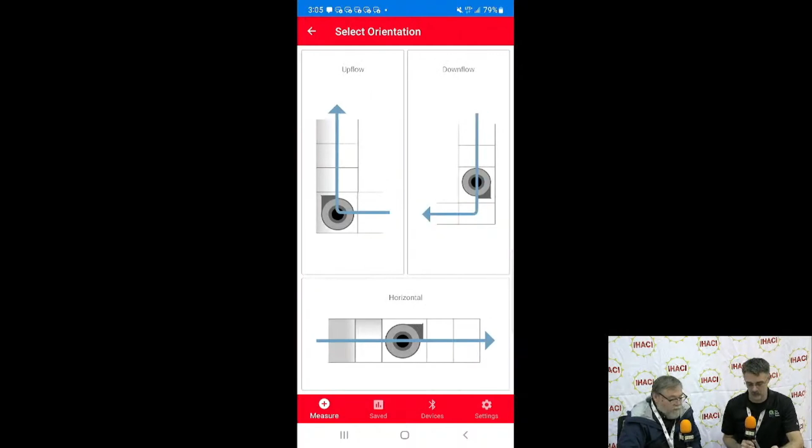And what's a common furnace type in your area? Upflow. Okay, so let's select an upflow furnace.

Now we've got to answer some questions about that system, like where our air filter is located. The choices we get are filter grill, filter slot in the return duct or cabinet, or multiple filter grills.

And you and I talked about this earlier briefly, right? You were talking about multiple filter grills? No, that was somebody else. Okay, that was somebody else. That's okay, it was my twin brother. It was your twin brother? Okay, well there's a lot of people I've talked to here already.

But multiple filter grills is a question we get a lot about - how to handle multiple filter grills. So let's take a look at that, because there's a lot of houses out there with multiple filter grills in them.

So this is going to be part of the forecast view: do we want to separate the filter pressure drop from the return pressure drop, taking the filter out of that calculation?

So there we have to take another pressure reading immediately on the backside of the filter. That way we can show how much pressure drop happens at the filter versus how much happens in the return duct. So if we separate those two, that's going to take another reading for us.

External indoor cooling coil - well yeah, because we've got a gas furnace, we're going to have a coil that's separate, so we got to put that in there. So we want to put our rated input - what's our rated input on that furnace in BTUs per hour? Let's just say it's 80,000. Okay, we'll go with 80,000.

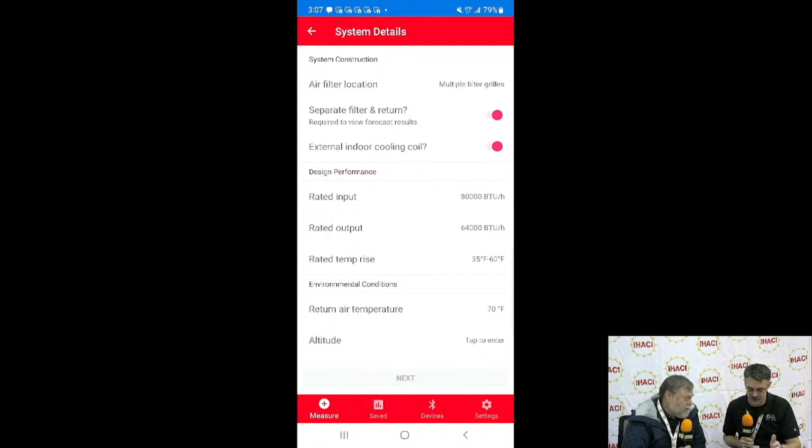All right, so there's our 35 to 60. Our return air temperature comes in nominal at 70 degrees. Just say you can change that. We'll just leave it at 70 for now. Altitude, let's just say it's 75 feet. We're in Modesto, 75 feet. Okay, so pretty low down.

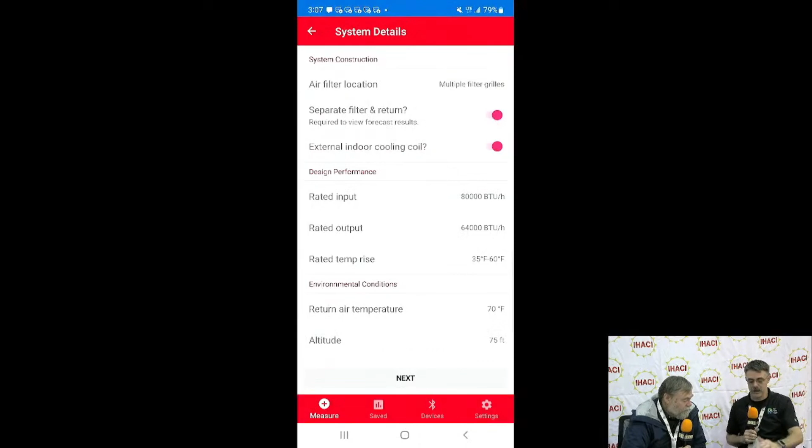Now that we've got all that information filled in, we're just going to hit next. It's going to give you some notes here. It's going to tell you to close the humidifier dampers if you have any.

We're in a dry climate, so you may want to have humidifiers in the wintertime. Right, might be a good thing. California, we don't usually do it, so all our moisture stays in the air, doesn't freeze out. That's part of the reason it doesn't freeze out all the moisture, so we don't need a humidifier typically in Central Valley. Gotcha. Of Modesto.

I mean, they put these notes in there as universal because they go across the country. It's not just California, it's everywhere. Yeah, my market, we use a lot of bypass humidifiers. That's a very applicable note. Right, so you would have to put that. We would have to close that.

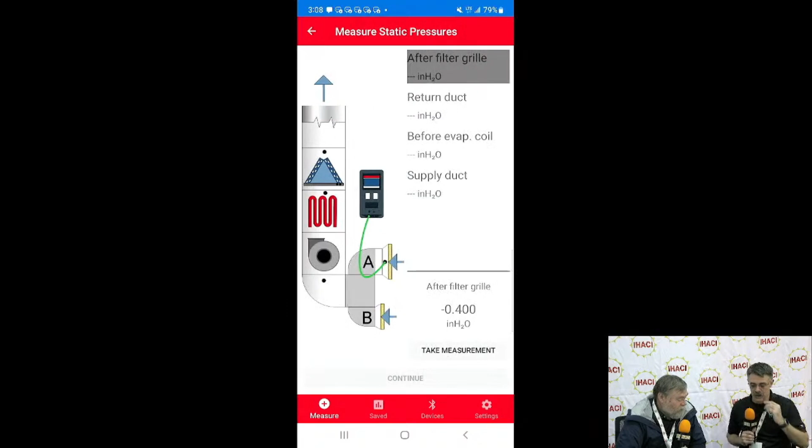So we want to set the equipment up to heating mode, high heating speed, and then we're going to take the pressure measurements. It's going to indicate where to take these duct pressure measurements. Right, so now it's going to show you where to go, where to take stuff at. So on this one, because we're going to have 4 measurements now: one side of the filter, the return duct itself, before the coil, after the coil, and supply duct.

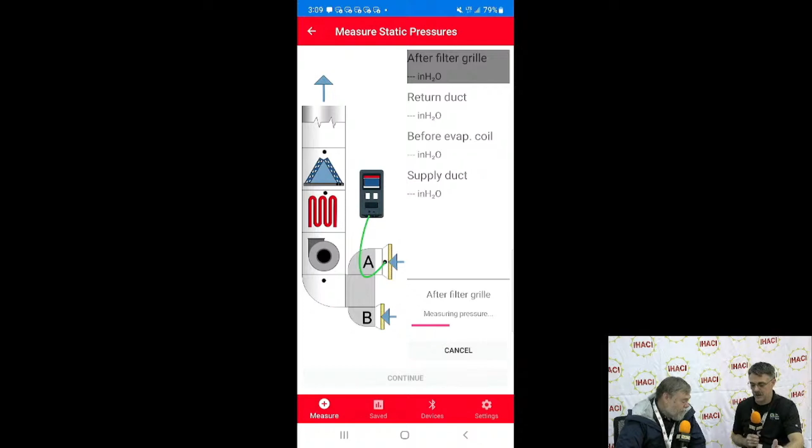Yep, so we're going to put the probe in there wherever it shows on the screen. You're just going to hit take measurement. And in this case, it was saying 0.40, negative 0.40, and it's going to put that in. Now Mitch knows this because this is a demo mode and it does the same thing every time.

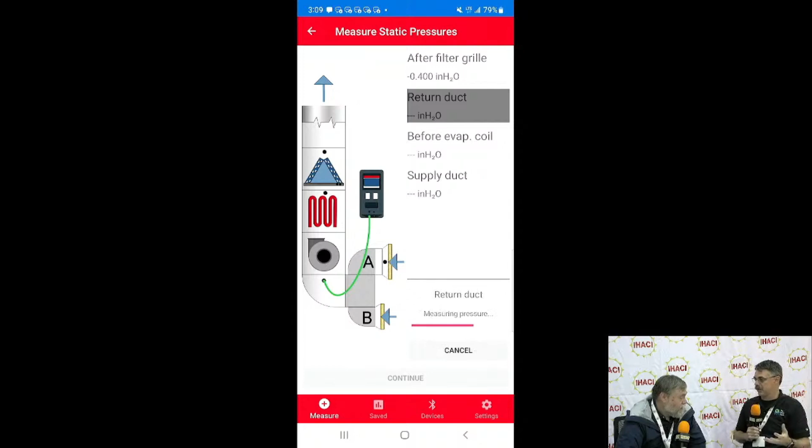We're going to move that probe over. We're going to take another measurement, and you'll notice this isn't just an immediate measurement. It's actually taking a sample group of measurements, so we get a more accurate reading than just a snapshot. Correct, because these things change in that duct all the time.

Yes, if you ever put a sensitive manometer in there, this is a micromanometer, they're up and down all over the place. Up and down all over the place.

The cool thing about this DG8, if nobody's there, if you haven't used one of these, the DG8 uses the same sensors that a blower door manometer does. So it's basically a DG700 or DG1000 just converted into a more simple single channel with dual ports. But it has that auto zeroing feature on there, so there's a little valve in there that auto zeros that, so you don't have to keep hitting zero.

So how often do you have to calibrate the DG8? Should be calibrated once a year, best practices, just like a blower door. Or, I'm sorry, this one, no—DG8 is 5 years.

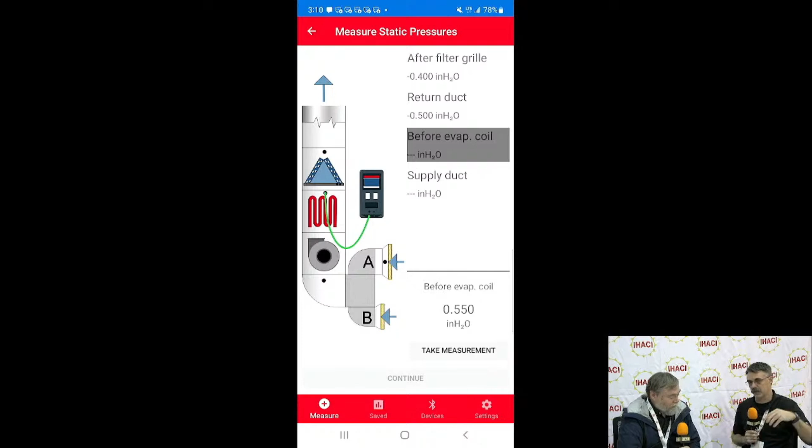Yeah, I thought it was when you said 1 year, I was like, I thought it was longer than that. But you're 100 percent right, a lot of stuff, I deal a lot with combustion analyzers, I've got calibrations of 1 year on my brain. These are 5 years. And what they did was initially it was 1 year on those when they first came out with the DG1000, because this uses the same sensor as that. And what they did was they did some long-term testing on it, and they proved out that it could go for 5 years, so extended it out.

So now we're before the coil. Before the coil, we're going to take another reading.

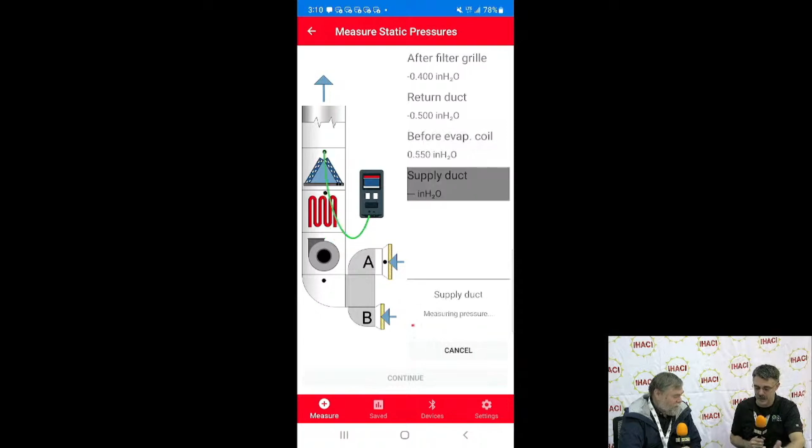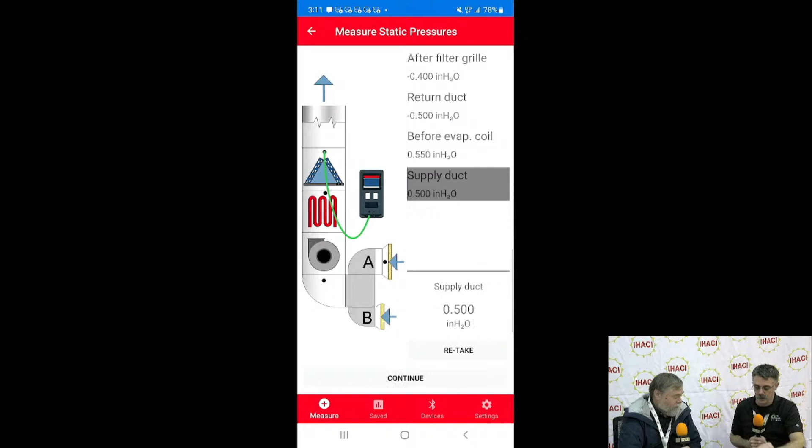And then we're going to move up to after the coil. We're going to take our 4th measurement. Not our final, but our 4th measurement in this, because we've got to take another one here. There's a little bit more work to do with the multiple filter grills. So once we're done with all those readings, we're going to hit continue.

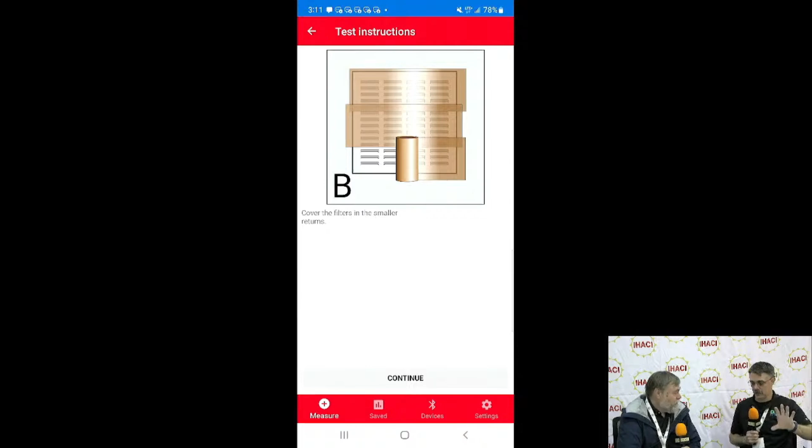Now we're going to mask or cover that filter in the smaller of the 2 filter grills. So you pick the smallest one, whatever everybody uses, peel and seal. Works great. Another option, if you don't have peel and seal, is a garbage bag over the filter. Does the same thing. So stick it back in there, right?

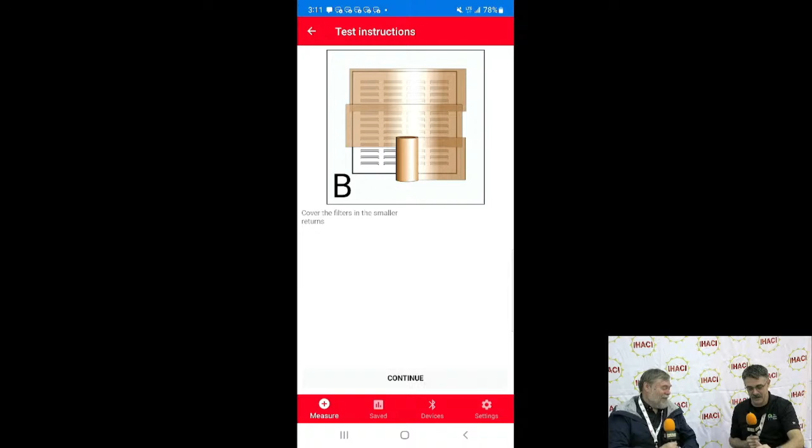Then you're going to put the filter grill itself, or the TrueFlow grid, into the other filter grill. Leave that grill open. The nice part is they have different adapters for different size ducts, so depending on different size returns, the grid comes out and you've got different size adapters that grid just snaps into. They have all kinds of different sizes, and you can also buy one that you make your own size. So if you're using a lot of 20 by 30s, you can make a 20 by 30. If you're 20 by 36, you can make a 20 by 36.

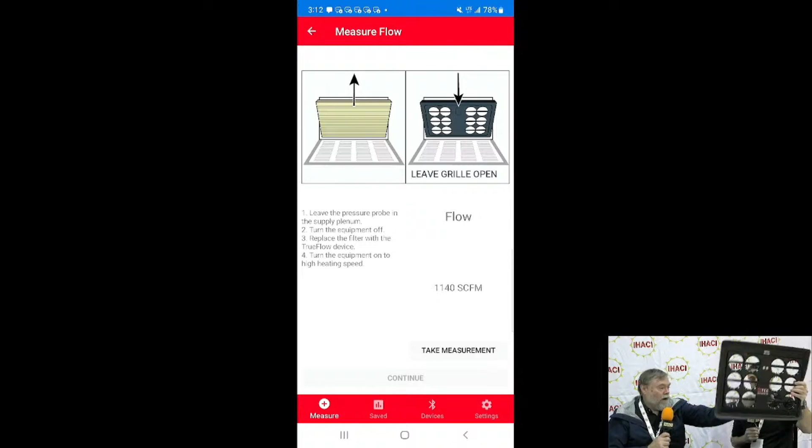If you don't have one that fits, let's see that for a second. If you don't have one that fits, what we do is we'll put it in the grid.

No, we're on the camera. We're under the camera. We're good.

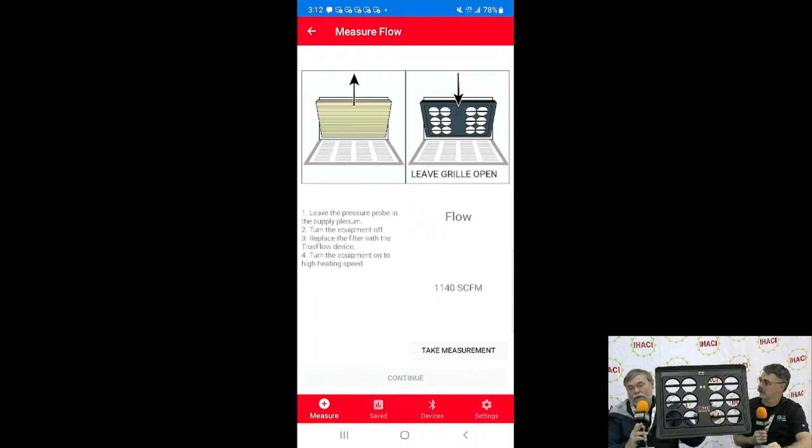So we'll tape off the side, so you can use this in a bigger grill, no problem. Just tape off the side here. So basically what you do, because all we need is the readings out of the grid itself. The idea is you want to force all the airflow through that grid, because what it's doing is looking at that supply static measurement, since that probe is still in your supply static. It's comparing that static pressure between when the filters were in place normally versus what the airflow or static pressure is with the grid in place, and it runs a correction factor.

It's awesome. So go ahead, we've got it, we're going to take a measurement. So you got that in there. Then we're going to take the measurement, and now we're going to get the airflow, what the airflow was with the filters in place. That's what we want to be reading, we want to know what it is. And in this case, it's 1140 CFM.

Now that's great if it was a 3 ton or 2.5 ton. That's real good if it's a 3 ton, yeah, we're a little shy. If it's a 3.5 ton, we're a lot shy. But we don't know necessarily.

Now our workflow is complete here. We're going to hit OK, and it's going to save it. We can save this, put a name on there, demo. We're just going to leave it at that, because it saves the date and time. That's fine.

Right, now we have our static pressure is high on that. Very high on the system. We're looking at a static pressure of over an inch of water column, which means that I had the airflow for maybe a 3 ton or a 2.5 ton, but I don't have the static pressure. So that blower is going to use a lot more electricity.

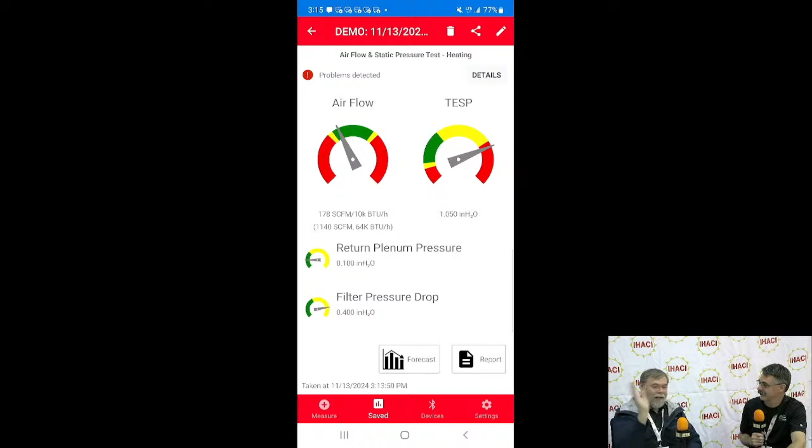So do you know how I used to do it in the old days? I had a Magnehelic gauge. I'd say, you watch that Magnehelic, and I'm going to go take that filter out, put a clean one in. And it's pegged, take that one out, now it's back at a half inch. That was the old days. But even though it's a very accurate instrument, it's very hard to read because it's an analog gauge. And it's also not something you can leave behind typically with that homeowner.

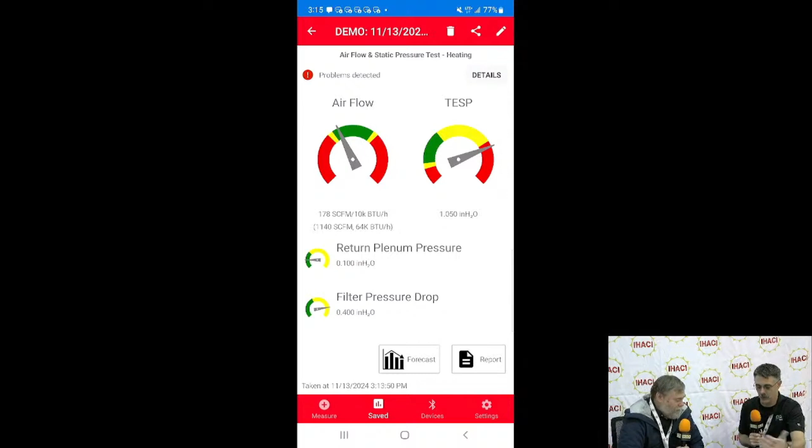With this, I got a report. When you hit that report button, enter some more information out there, the address, and hit create report. Now you end up with a PDF report, and on the report you can put your own logo on there. You can see my logo at the top. You got it all in there.

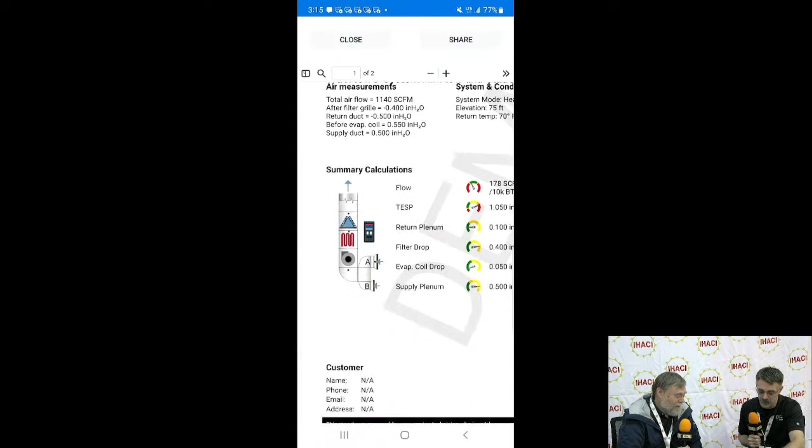So you can share that with them, PDF it right to them. Makes it really easy, and it shows... we can zoom in down here. Look at that, you pull it in that way. It'll show you where your problems are.

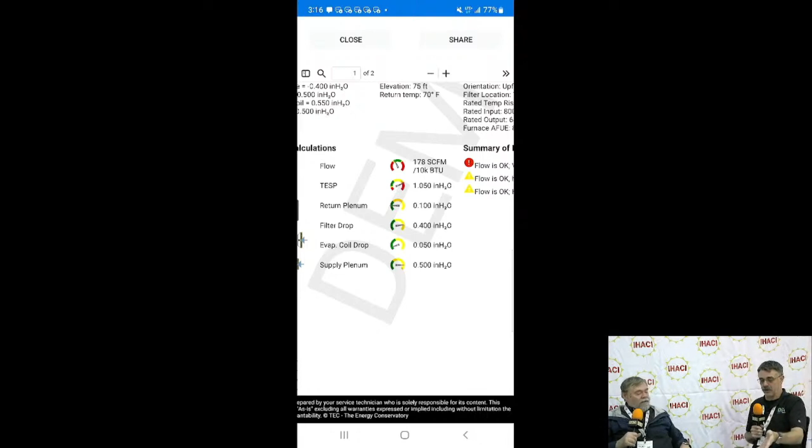So I need, if that's a clean filter, if that's a perfectly clean filter, then that filter needs to go, or you need to put in a bigger filter grill. Bigger filter, or two filters, or you might need to put two in. We might need to put a third filter in there. We need to put something bigger in to drop that resistance.

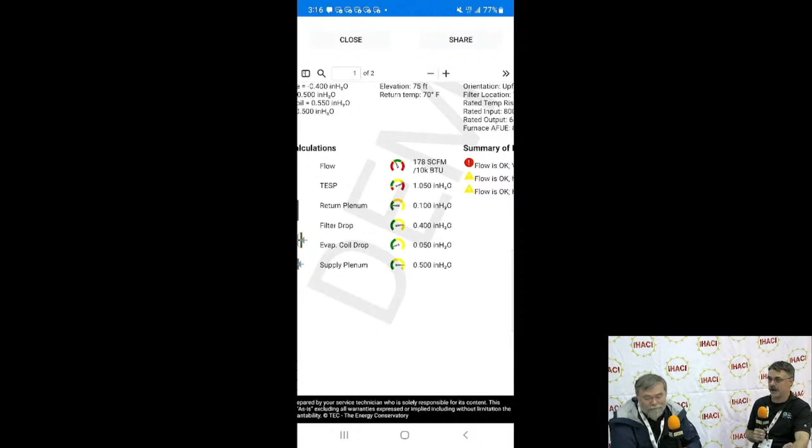So that's a case where if I'm going to go in and put a 3 ton in, I'm also going to sell that person an upgraded filter, or maybe put a deep pleated filter in there instead of that 1 inch.

Hi, Mitch Bailey here. So one of the biggest problems with any heating and air system is airflow and getting good filtration in the system.

A lot of times the high static pressures that we get in a system, we can't use a really good filter. In this case here on this guy's home, we're going to add a second return air, because he wants to use a nice MERV 10 filter in his system, and he can go to like a MERV 13 with this type of system. It's designed to go into a filter grill, and it fits up inside the filter grill. It's got a lip on it that allows it to do that.

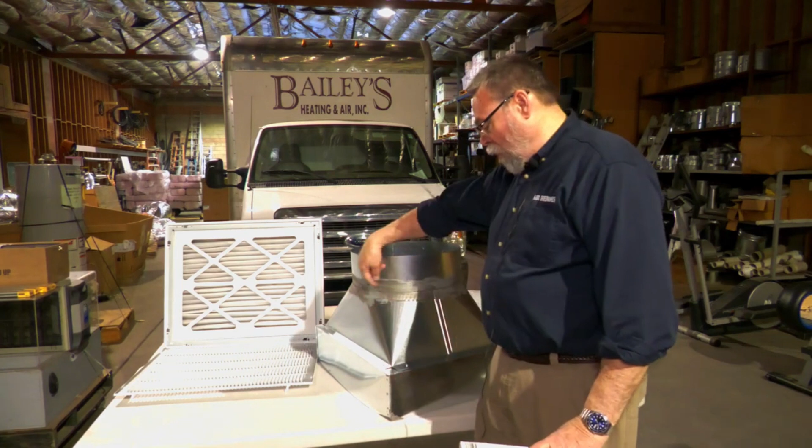The other thing we're doing is we're increasing the airflow so we can use the complete filter. The way we're doing that is we're using a squared elbow as opposed to just having a 4-inch can and a collar tapped in the top of it. We get to use the whole filter, so we're not restricting the airflow. This will keep the airflow very high in the system, and it'll keep the static pressure very low.

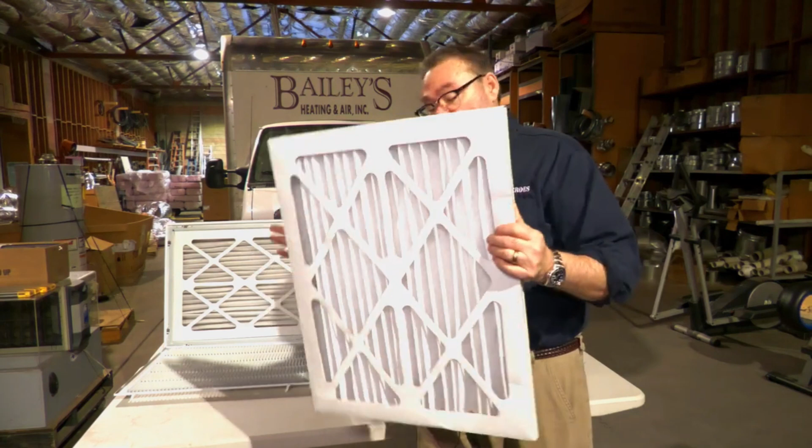Again, we can double up the filters. We can use a really good filter. We have to double the filter grills to do that, and we should go to squared elbows wherever we can to increase the airflow through the system.

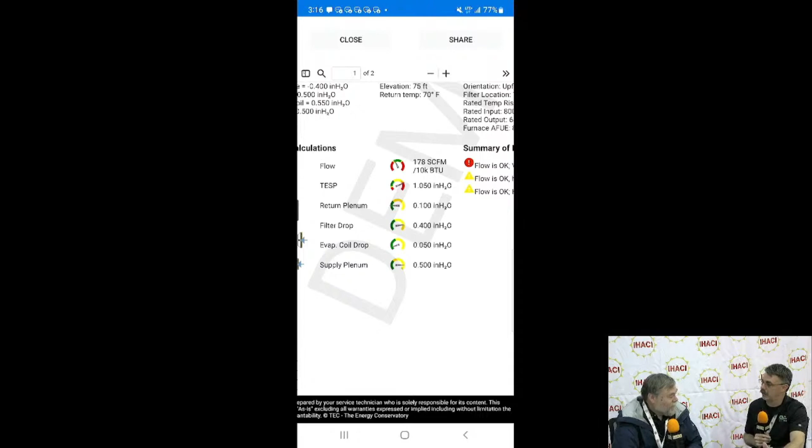Filter. Right, something else to solve that problem. So, to me, this is very much a game changer in the industry with regards to being able to take quick and accurate airflow measurements and then be able to predict what's going to happen with that duct system.

It all comes down to workflows. Let's drop back because you do have NCI workflow. Let me bring it back here, let me hit the measure.

So NCI has put in workflows, have paired up with TEC, put in all these different workflows for the National Comfort Institute that they actually want you to use to do this. I use the NCI once in a while, but basically I'm still just using the standard, doing my pressure test and stuff because I got to move through the house, I'm doing a lot of testing when I go in. But with all that testing, you have a baseline to look at the system.

You have a benchmark that you can use to say this is where you're at now. Let's go do the load calc, let's see how it all compares and see where you're at. Because it's amazing.

And then I go a step further. I usually do the ASHRAE 221, take my readings on the equipment, and find the efficiency of the equipment, and we show all the different problems the system has. There's a ton of different stuff we can do with this. If we take this before we change the filters, and take it after we change the filters, now it's a repeatable test. We can come back in later after we change all the equipment, fix everything, and prove to that customer, look, here's what it is now.